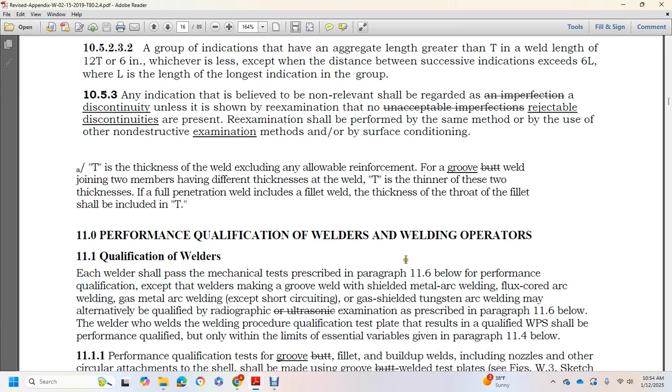Performance qualification of welders and welding operators. Each welder shall pass a mechanical test prescribed in 11.6 below for the performance qualification, except for welders making the groove weld with shielded metal arc welding, flux cored arc welding, gas metal arc welding (except short circuiting), or gas tungsten arc welding, who may alternatively be qualified by radiographic examination prescribed in paragraph 11.6 below.

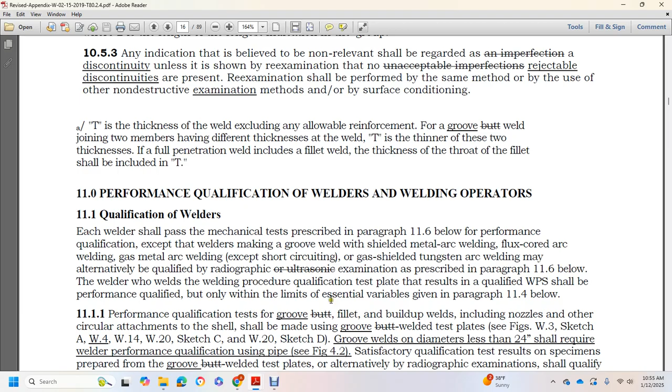A welder who welds a welding procedure qualification test plate resulting in a qualified welding procedure specification shall be performance qualified only within the limits for the essential variables given in 11.4 below. Performance qualification tests for groove, butt, fillet, and build-up welds, including nozzle or circular attachments to the shell, shall be made using a groove welded test plate, Sketch A, W.4, W.14, W.20 Sketch C, W.20 Sketch D. Groove welds on diameters less than 24 inches shall require welder performance qualification using pipe.

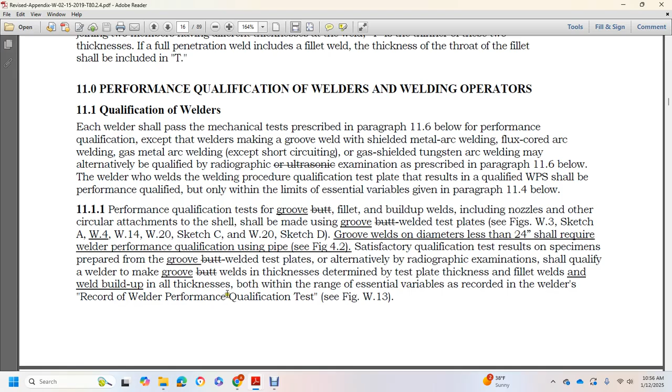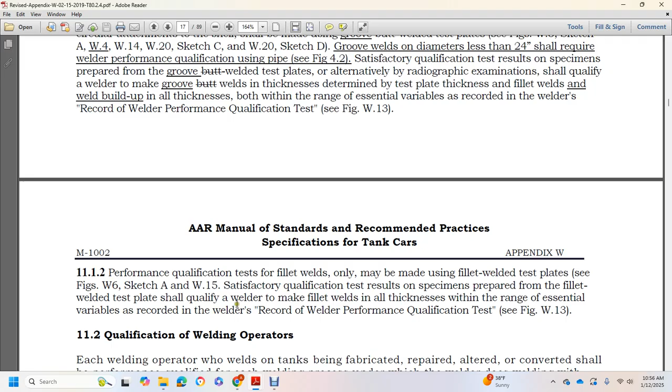Satisfactory qualification test results from specimens prepared with the groove weld test plates, or the alternative radiographic examination, shall qualify the welder to make groove welds in thicknesses determined by the test plate thickness, and fillet welds and weld build-up in all thicknesses, but within the range of essential variables recorded in the welder's record of welder performance qualification test. See figure W.13. 11.1.2 Performance qualification tests for fillet welds only may be made using fillet weld test plates. See figures W6 sketch A and W.15. Satisfactory qualification test results from specimens prepared with a fillet weld test plate shall qualify the welder to make fillet welds in all thicknesses within the range of essential variables recorded in the welder's record of welder performance qualification test, figure W.13.

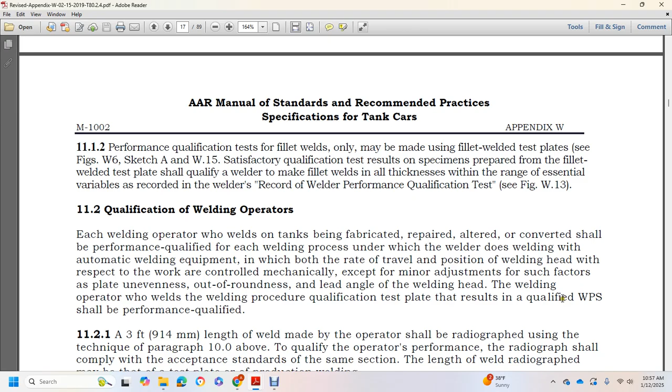Qualification of welding operators. Each welding operator who welds the tanks being fabricated, repaired, altered, or converted shall be performance qualified for each welding process under which the operator does welding: automatic welding, in which the travel and position of the welding head with respect to the work are controlled mechanically, except for minor adjustments for such factors as plate unevenness, out of roundness, and lead angle of the welding head. The welding operator who welds the welding procedure qualification test plate resulting in a qualified welding procedure specification shall be performance qualified.

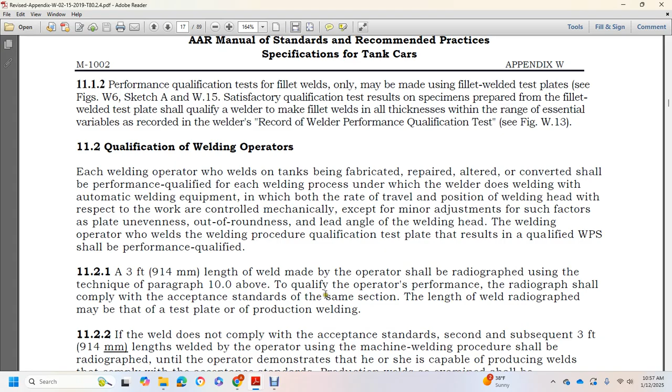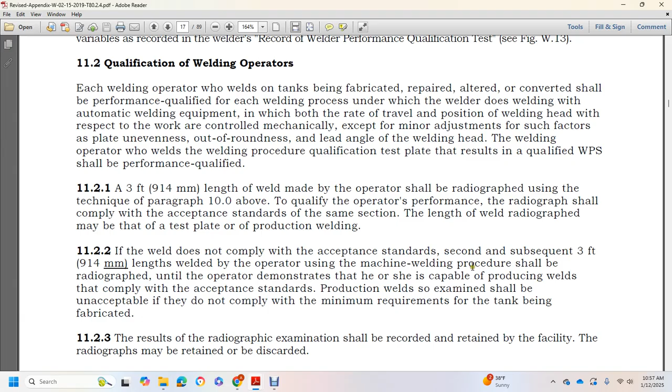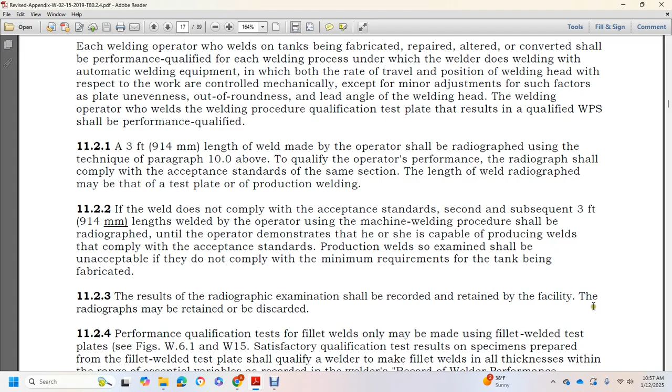11.2.1 A 3 foot length of weld made by the operator shall be radiographed using the technique in paragraph 10.0 above. To qualify the operator, the radiograph shall comply with the acceptance standard of the same section. The length of weld radiographed may be that of the test plate or production welding. If the weld does not comply with the acceptance standard, subsequent 3 foot lengths welded by the operator using the machine welding procedure shall be radiographed until the operator demonstrates that he or she is capable of producing welds that comply with the acceptance standards. Production welds examined shall be unacceptable if they do not comply with the minimum requirements for the tank being fabricated. The results of the radiographic examination shall be recorded and retained by the facility. Radiographs may be retained or discarded.

Performance qualification tests for fillet welds only may be made using fillet weld test plates. See figures W.6.1 and W15. Satisfactory qualification test results from specimens prepared with the fillet weld test plate shall qualify the welder to make fillet welds in all thicknesses within the range of essential variables recorded in the welder's record of welder performance qualification test. See figure W.13.

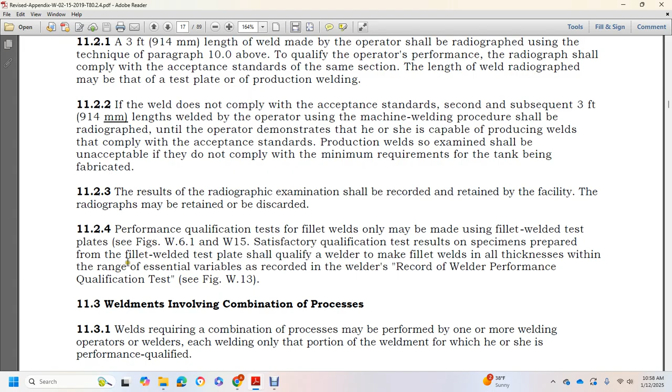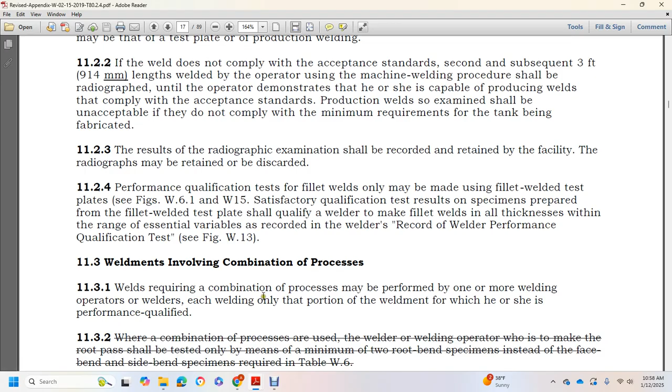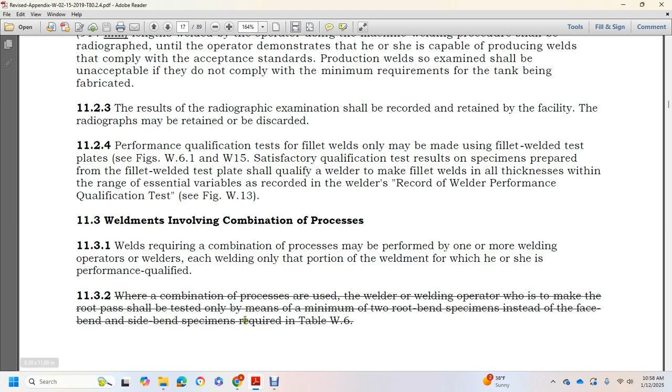11.3 Weldments involving combination processes. For weldments requiring a combination of processes performed by one or more welding operators or welders, each shall weld only the portion of the weldment for which he or she is performance qualified. When combination processes are used, the welder or welding operator who makes the root pass should be tested only by means of two root bend specimens instead of the face bend and side bend specimens required in table W6.

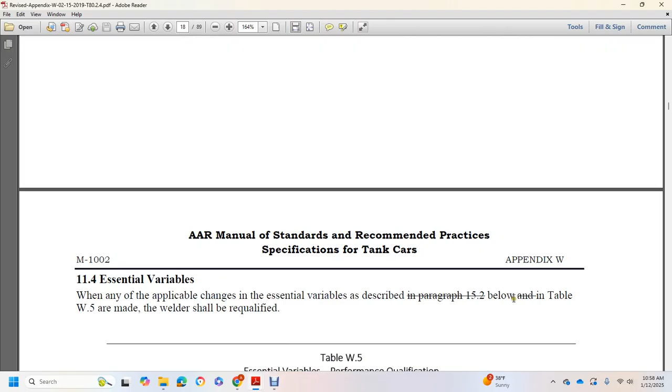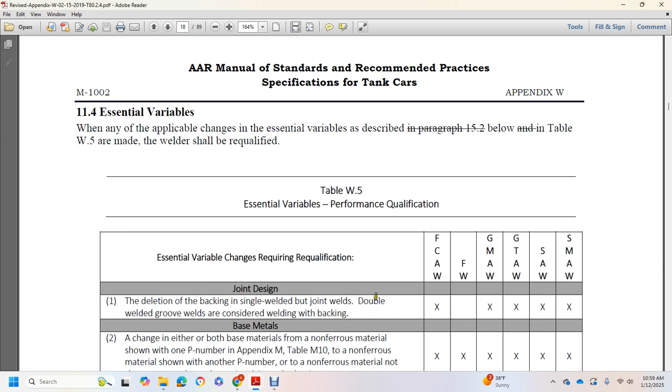11.4 Essential variables. When a change in an applicable essential variable described in paragraph 15.2 below and in table W5 is made, welders shall be requalified. Essential variables for performance qualification: flux cored arc welding, gas metal arc, gas tungsten arc, submerged arc welding, and shielded metal arc welding. Joint design essential variable change requiring qualification: deletion of backing in a single welded butt joint; double welded groove welds are considered welding with backing.

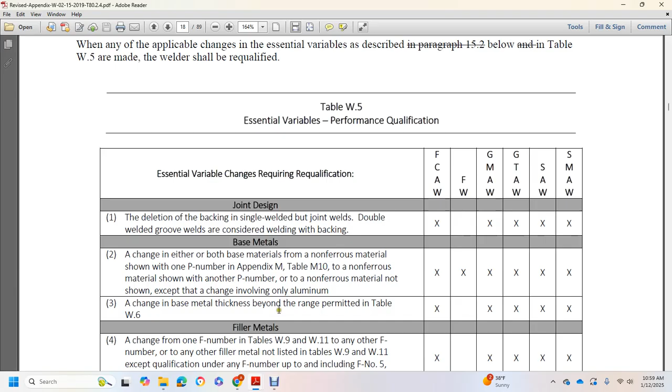Base materials: a change of either or both base materials from a non-ferrous material with one P number to a non-ferrous material with another P number, except for changes involving only aluminum. A change of base metal thickness beyond the range permitted in table W6.

Filler metals: a change from one F number in tables W9 and W11 to any other F number, or to any other filler metal not listed in tables W9 and W11, except that qualification under F numbers up to and including F number 5 shall qualify the welder for all lower F numbers. Qualification with an F number 2X aluminum filler metal shall qualify to weld with the other F number 2X filler metals.

A change of the F number in table W9 to any other F number, or to any other filler metal not listed in table W9, except that deposited weld metal from bare rod not covered by an AWS specification conforming to the analysis listed in table W10 shall be considered classified as F number 6. The omission or addition of consumable inserts is an essential variable; changes require requalification.

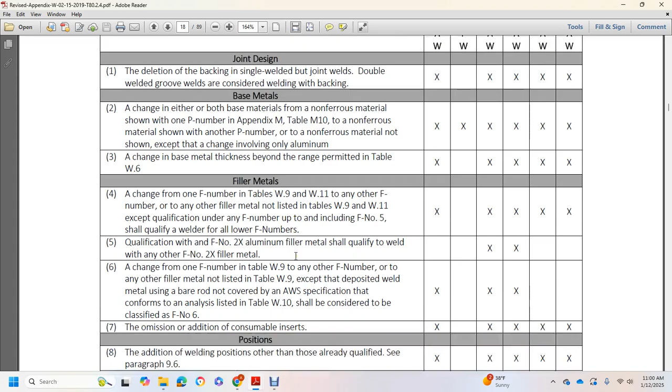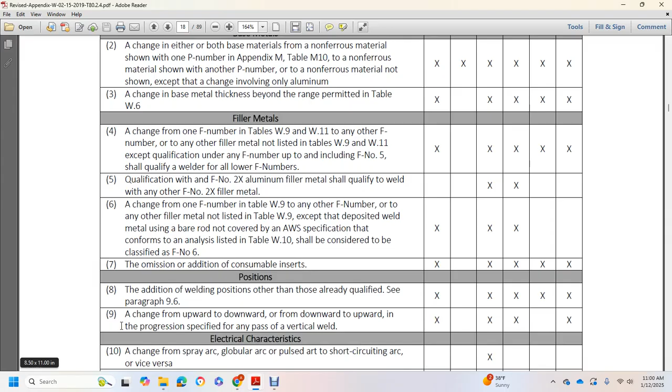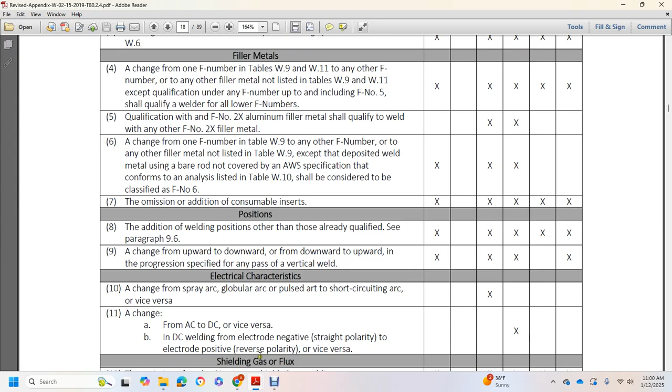Position: addition of welding positions other than those already qualified. See paragraph 9.6. A change from upward to downward, or from downward to upward, in the progression specified for any pass of a vertical weld. Electrical characteristics: a change between spray arc, globular arc, pulsed arc, and short circuiting arc, or vice versa; changing from AC to DC, or vice versa; in DC welding, from electrode negative straight polarity to electrode positive reverse polarity, or vice versa.

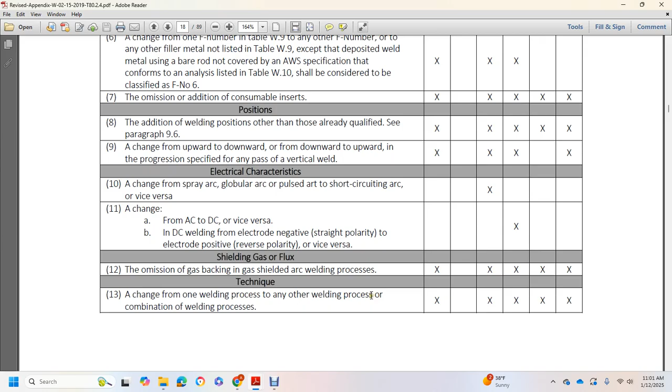Shielding gas or flux: omission of gas backing in gas shielded arc welding processes. Technique: a change from one welding process to another welding process or combination of welding processes.

11.5 Test joints. 11.5.1 Information regarding the essential variables in paragraph 11.4 above, such as base material, filler metal, and welding position, shall be recorded on the facility's record of welder performance qualification test prepared for each welder qualified, figure W.13. Otherwise, the details of the essential variables of the welding procedure specification being used shall be followed in making the performance qualification, except as otherwise allowed below.

For the welder performance test, postweld heat treatment of coupons may be omitted. The dimensions of the test and the length of the weld shall be sufficient to provide the required test specimens. If alternative qualification by radiography is used for groove welds as permitted in paragraph 11.1, the minimum length of weld radiographed or ultrasonically inspected and evaluated in plate shall be 6 inches and shall include a start and stop in each pass along the length of the weld.

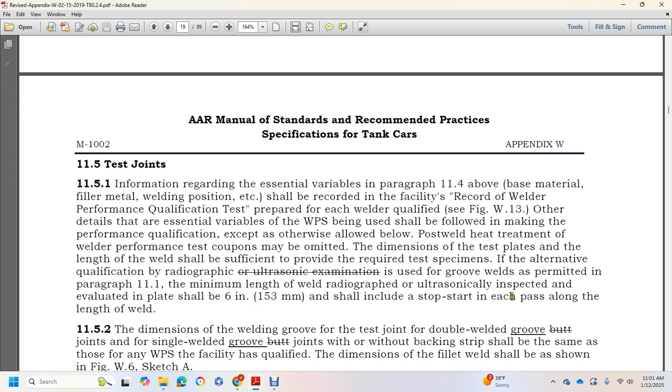The dimensions of the welding groove of the test joint for double-welded groove joints and single-welded groove joints, with or without backing strip, shall be the same as those of the welding procedure specification. Facilities that qualify with fillet welds shall use the dimensions shown in figure W6, sketch A.

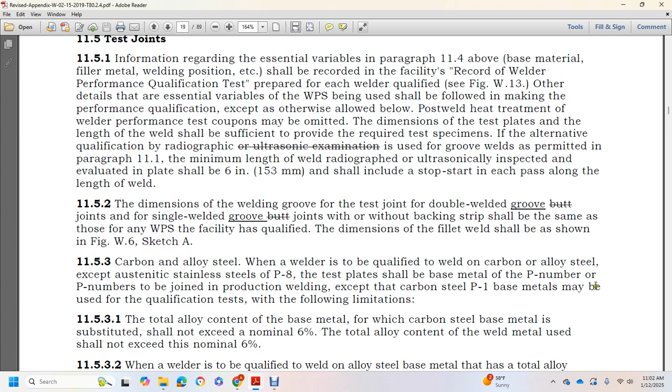Carbon and alloy steel: when a welder is qualified to weld carbon or alloy steel, except austenitic stainless steel P8, the test plate shall be of the base metal P number used in the production weld, except that carbon steel P1 base metals may be used in qualification tests with the following limitations. The total alloy content of the base metal for which carbon steel is substituted shall not exceed a nominal 6%. Total alloy content of the weld metal shall not exceed a nominal 6%.

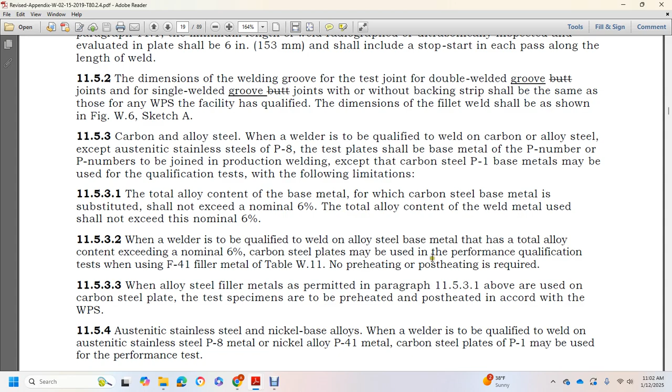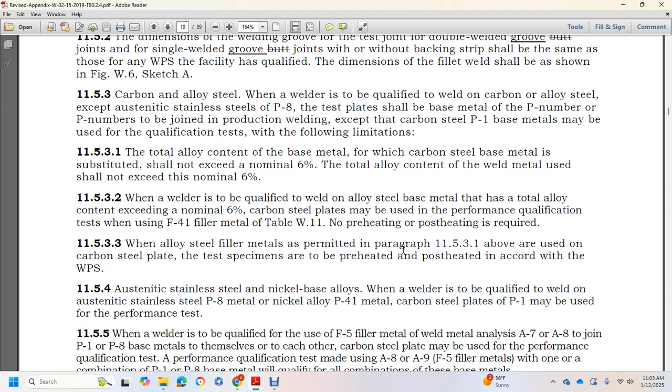When the welder is qualified to weld alloy steel where the total alloy content exceeds 6%, carbon steels may be used for performance qualification testing with an F-41 filler metal, table W11. No preheating is required. When alloy steel filler metals are permitted per paragraph 11.5.3.1 above and used on carbon steel plate, the test specimens are preheated and post-heated in accordance with the welding procedure specification.

Austenitic stainless steels and nickel-based alloys: when welders are qualified to weld on austenitic stainless steel P8 metal or nickel alloy P41 metal, carbon steel plates P1 may be used for performance tests.

When a welder is qualified using the F5 filler metal, the weld metal analysis A7 and A8 joined with the P1 or P8 base metals themselves, each to the other, or carbon steel plate may be used for the performance qualification test. Performance qualification test with A8, A9, F5 filler metals with one or more combinations of P1 or P8 base metals will qualify all combinations of these base metals.

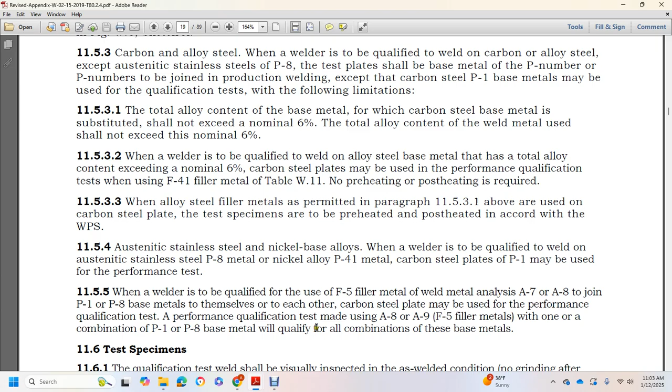Test specimens. For the qualification test, the weld should be visually inspected in the as-welded condition, no grinding after completing the weld, in accordance with paragraphs 14.5 and 14.10 below, except the reinforcement may be up to 1/8 of an inch. Welding performance qualification mechanical testing: the type and number of test specimens required, together with the range of thickness of the material the welder is qualified for by use of a given thickness of test plate, is shown in table W6.

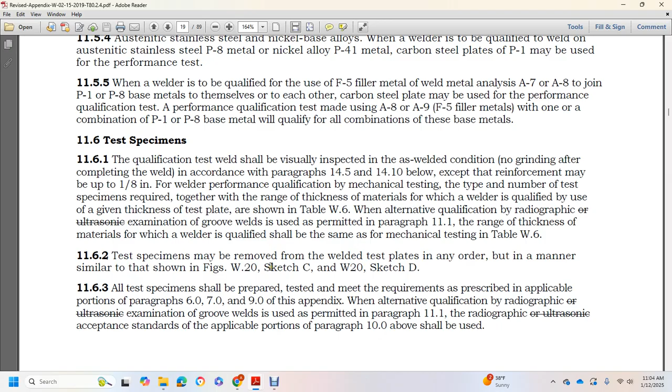Alternative qualification by radiographic examination of the groove welds is permitted within paragraph 11.1. The thickness range of the material the welder is qualified for shall be the same as mechanical testing table W6. Test specimens are removed from the welded test plate in a manner similar to that shown in figure W20 sketch C and W20 sketch D. All test specimens shall be prepared and tested to meet the requirements prescribed in the applicable portions of paragraphs 6.0, 7.0, and 9.0 of the appendix.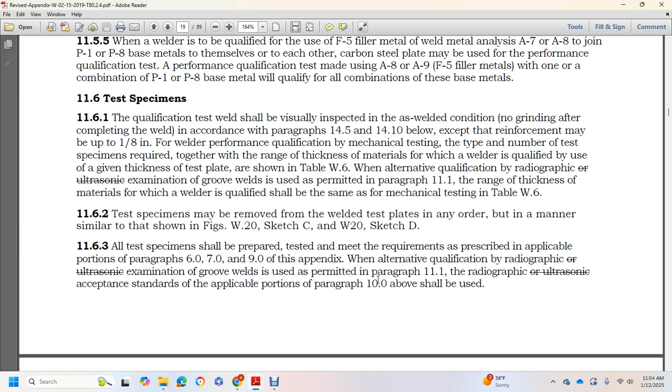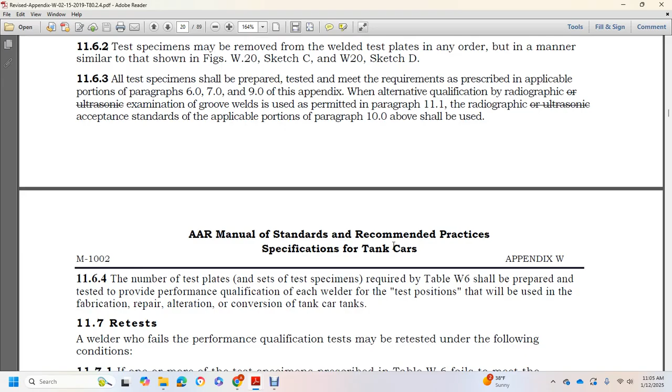Alternative qualification by radiographic examination of groove welds is permitted in paragraph 11.1, except the standards in applicable portions of paragraph 10.0 above shall be used. 11.6.4, the number of test plates and sets of test specimens required by table W6 shall be prepared and tested for the performance qualification in each test position that will be used in the fabrication, repair, alteration, or conversion of tank car tanks.

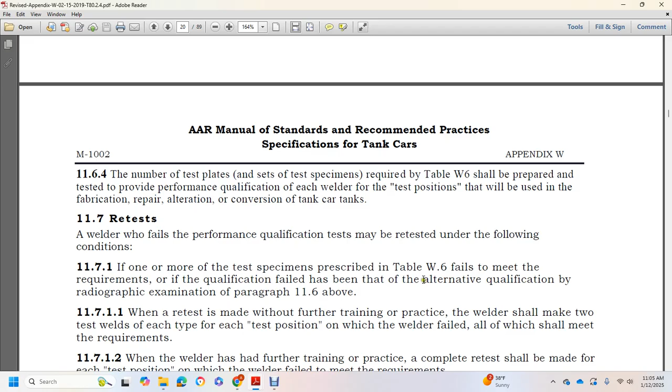11.7, retests. A welder who fails the performance qualification test may be retested under the following conditions: if one or more of the test specimens prescribed in table W6 fails to meet the requirements, or if the qualification failed with the alternative qualification by radiographic examination, paragraph 11.6 above. When a retest is made without further training or practice, the welder should make two test welds for each test position on which the welder failed, all of which shall meet the requirements.

If the welder has further training and practice, complete retests shall be made for each test position in which the welder failed to meet the requirements. If the performance qualification was tested by radiography, the retest shall use the radiographic examination method.

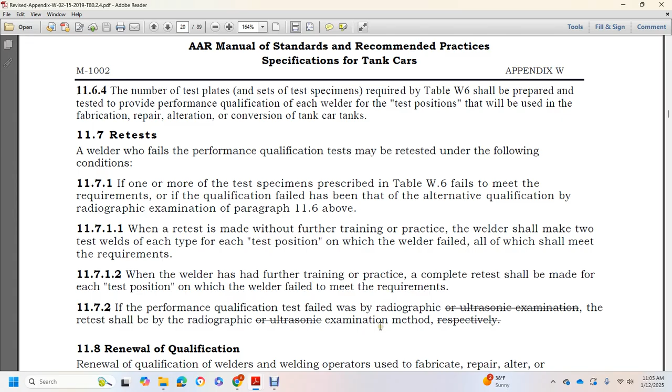Renewal of qualifications, 11.8. Renewal of qualification of welders and welding operators used to fabricate, repair, alter, or convert tank car tanks is required under the following circumstances. When the welding operator has not used the specific process for which he or she was qualified with the employer for a period exceeding 6 months, renewal of qualification under this paragraph shall be made in all positions in which welding is performed, in accordance with table W2. When there is a specific reason to question the welder's ability to make welds that meet the specification, renewal qualification under this subparagraph shall be made in all positions in which welding is performed, in accordance with table W2.

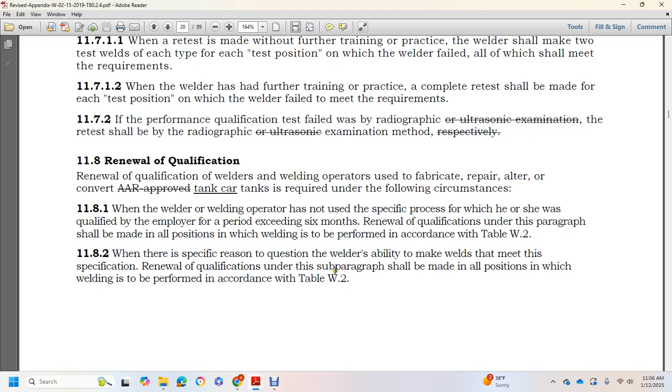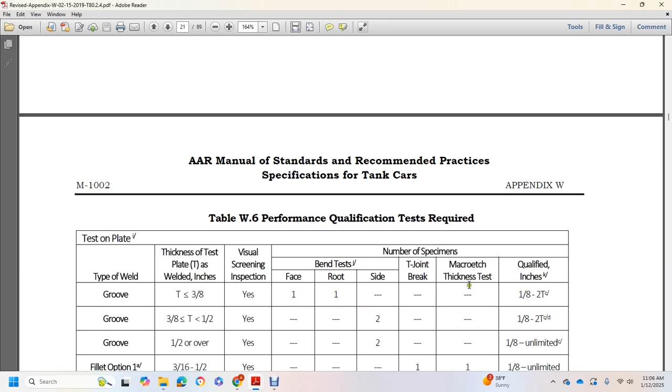Thinnest plate is less than 3/8 of an inch. 3/8 of an inch or greater. The test plate is greater than 3/8 of an inch but less than a half inch. The groove is 1/2 inch or over, and fillet option 3/16 to 1/2 inch. Fillet option 2, 3/8 of an inch. All those are visual inspection.

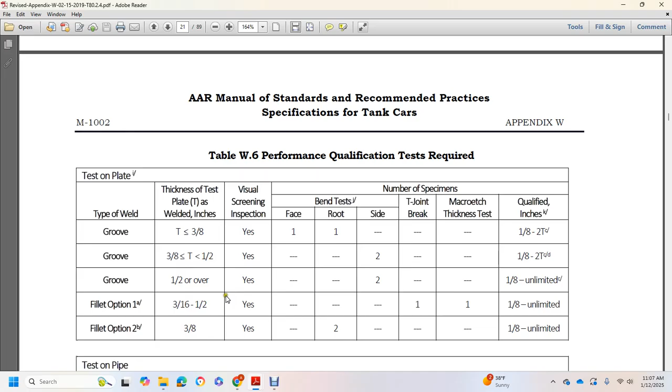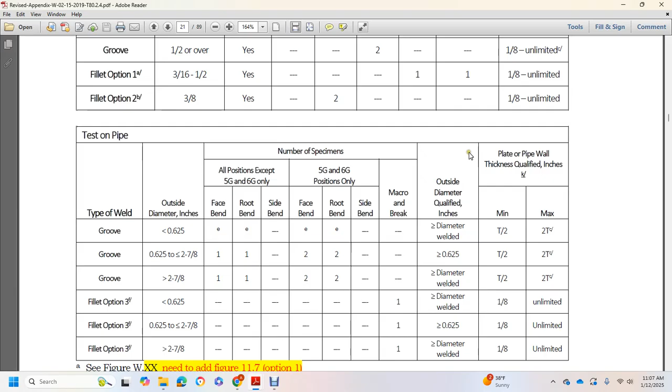And then they have test on pipe: type of weld, outside diameter in inches, number of specimens, all positions except 5G and 6G only, face, root, side bend, 5G and 6G position only. Face, root, side bend, macro and break, outside diameter, qualified plate, pipe wall thickness qualified in inches, minimum, maximum, 3 grooves, 3 fillet options. Chapter 12, weld procedure qualification.